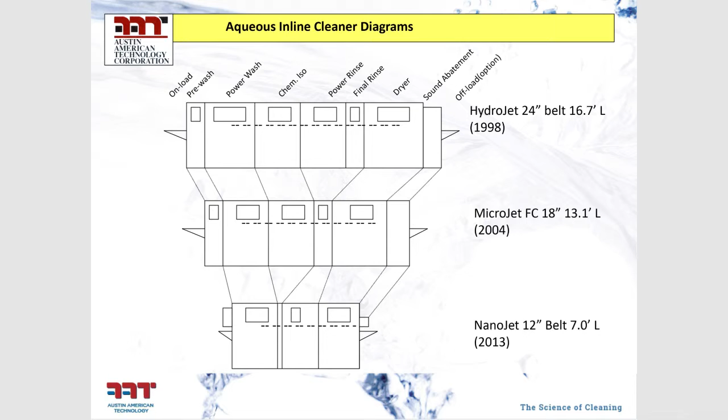So I'm going to focus a little bit more on the HydroJet right now, just thinking that you're looking at the HydroJet or the MicroJet, but we have the data on the other machines as well. So one of the things right off the bat you're going to see on all of our machines is that it's going to have a small footprint. We have the smallest footprint for belt size in the industry. The recirculated power PED wash is unique to our machines as well. And we're going to talk a little bit more about what PED means, progressive energy dynamics, in just a few minutes, so I'm not going to talk about that just now.

We can get up to temperatures of 150 degrees in that wash. The final rinse module is closed loop, as a standard configuration. That means that you would not have to have a DI system feeding it. We can make it an open loop system if you have a DI system in your plant and choose to run an open loop configuration.

One of the very special things about our machines is the jet dry isolation. So everybody else would use an air knife isolation. We're using jet dryer isolations. It doesn't actually dry the board, but it effectively strips the chemistry and puts it back into the wash.

And then finally, one of the big differentiating points we have on our machines is the patented displacement dryer. Our philosophy in drying is you don't want to evaporate any water on the surface of the board, because even DI water has some contaminants left in it. Even if it just absorbed the carbon dioxide out of the atmosphere, it could possibly leave a water spot if it evaporated. Certainly contaminated water would as well. So our approach in drying is to completely displace the water by blowing it off of the board and not drying it on the board.

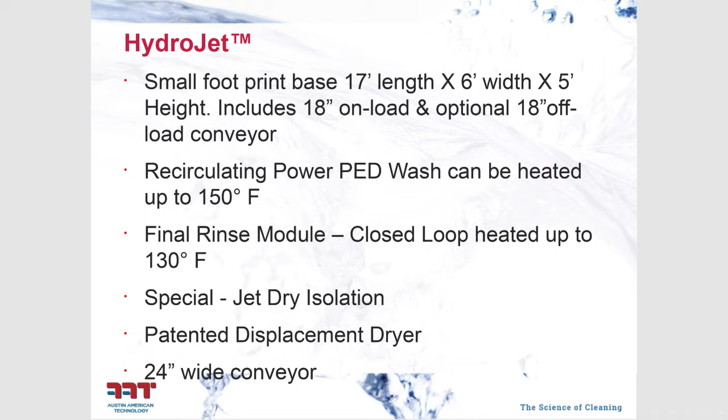A few things about the Austin American Technology machines that really stand out. We have the highest cleaning performance. The coherent jets and the progressive energy dynamics I mentioned previously really give us the best energy for cleaning and best getting under parts. We're going to see a film in just a few minutes about how that works. So it's going to give you your highest clean performance, but also, because of that, your highest throughput. Not only do we have good cleaning, but we also have excellent rinsing and the best dryer out in the market today that gives you the highest throughput.

And the cost of ownership is also the lowest. Not only do we have excellent isolation, chemistry control, DI control, but because the machine runs faster than the competition, you actually run it fewer hours. So the overall result is it costs you less to have an Austin American machine than the competition.

And finally, the closed-loop technology. We have been pioneers in the closed-loop technology. All of our machines, our batch cleaners, our conformal coat cleaners, our stencil cleaners, and our inline cleaners are all closed-looped and offer a configuration where nothing goes to drain. That saves the environment and saves you money.

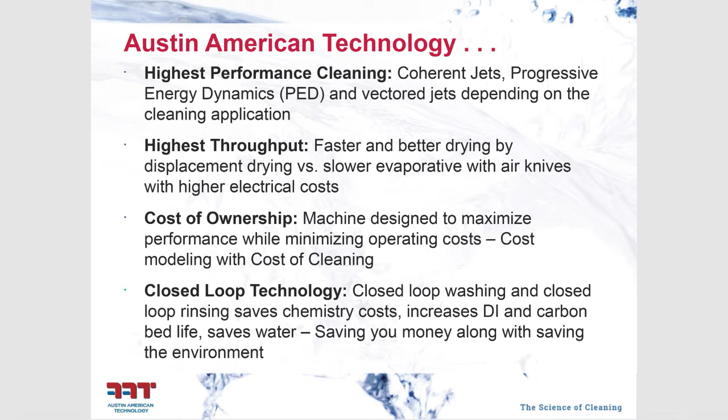So looking at the HydroJet cross-section, I just wanted to point out the sections that we have here. So the initial section is the isolation section for the onload. Basically, it's where we used to put the pre-wash, but we have moved the pre-wash inside of the wash to save chemistry, and we found that to be a very effective design change.

In the wash, you have essentially 5 spray bars in the MicroJet and the HydroJet configuration, and those 5 spray bars are impinging with coherent jets. We can vector the jets to give vectoring underneath the parts. It is the best way to get underneath parts with these jets.

Following the wash, we come out into the isolation section, where immediately we strip the chemistry off and return it back into the wash tank. That strips off 90 to 99% of the chemistry, and there is some optional stuff that we can add into the isolation section that would provide additional isolation. That would be a wet ISO bar and another topside dry ISO bar. That generally would go to drain if we add those options.

In the power rinse section, in the HydroJet, it would come standard with 3 spray bars, and you could add an additional 2 spray bars in the HydroJet. In the MicroJet configuration, you come with 1 spray bar, which can be extended to 3 spray bars. And those spray bars, again, are the coherent jets and give you very good penetration under parts to get the chemistry out, any chemistry that might reside in 1 mil gaps or in connectors and things like that.

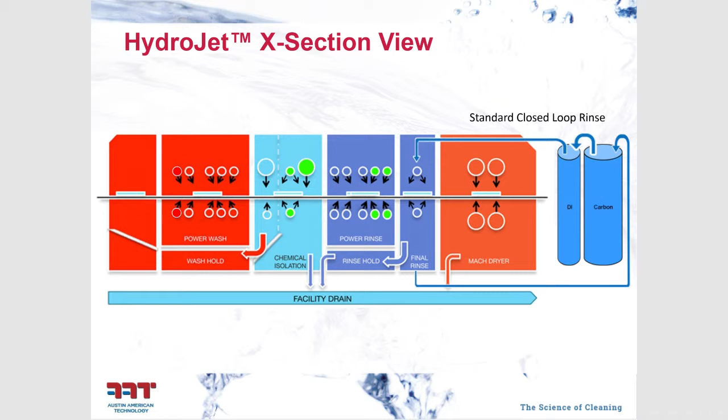So let's talk a little bit about the progressive energy dynamics now. In designing the machines in the very beginning, we did not have progressive energy dynamics. We had the same energy in all sections. And what we found out through our testing is that, especially on no clean fluxes or very highly heated rosin fluxes, we were wasting energy essentially in the beginning. So when we get into the first jet, wash number 1, if we had too much energy, we were just bouncing off the hard flux.

And what we found is we didn't need a lot of energy in wash 1, the first bar, or the first section. What we needed there was just enough flow to bring the flux to temperature and to wet the flux with the chemistry so that we begin the softening process. So we don't need a lot of energy in wash step number 1. When we get to step number 2, we want a medium amount of energy to come in, and we want that to begin to create flow underneath the parts. Now that we have a softened flux, we can get the flow established.

And then in wash step 3, we're going to come with high energy. We're going to begin what we call eroding the flux at this point, because we've got it nice and soft, and we want to begin eroding the flux underneath the parts. That's a very rapid cleaning operation versus dissolving the flux residues. And I'm going to show you a film in a minute that shows you how fast that really can be.

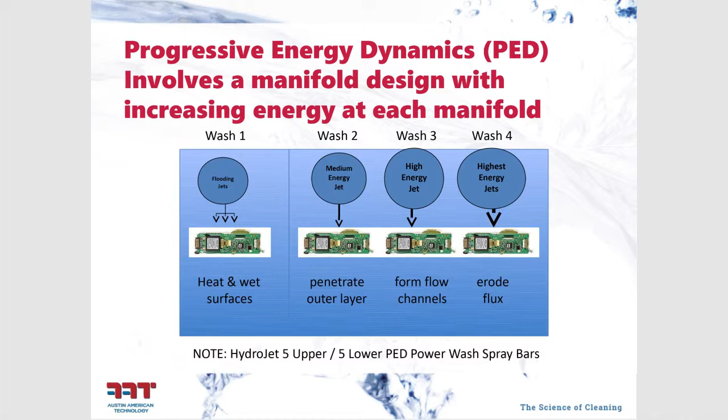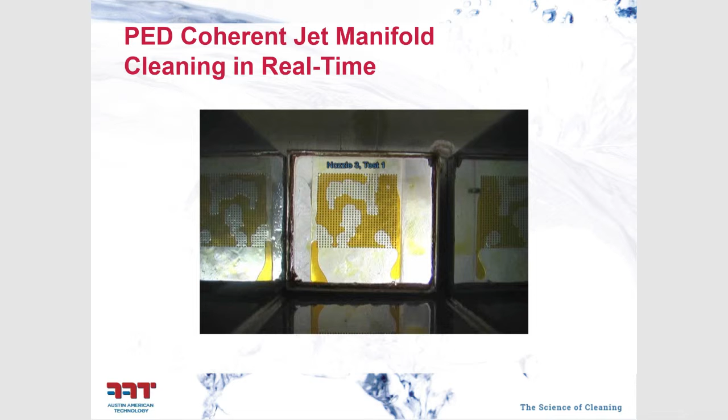Okay, so what I'm going to do now is I'm going to show you a film that shows a simulated BGA, which is made out of glass, and the substrate is made out of glass, and we're going to pass it through that progressive energy wash that I showed you just a minute ago. So I'll go ahead and start that now, and you can watch it run.

So as you can see in the film, we've got the spray started, and the spray is spraying on the coupon. The coupon is passing through the lower energy sections, and we're beginning to get some flow established. As we get into the higher energy sections, you're going to see the erosion occurring. You're going to see that rapid removal of the flux, and the complete cleaning operation occurs in just a few seconds.

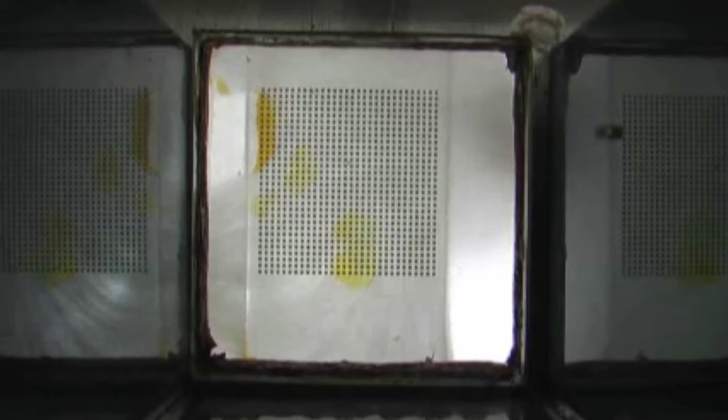All right, well, based on that video, you can see that the cleaning is very rapid in the progressive energy cleaning system. And what that really gives us when we look at inline cleaners versus batch cleaners, we can see that we can clean a lot tighter gaps. And by cleaning, I mean completely remove the flux. In batch cleaners, we can generally clean down to 2 to 5 mil gaps. We start having a lot of difficulty below that.

But in the inline cleaning process, we can get down, because of the energy, down to 1 mil gaps. So we can do things like flip chips, QFNs, some of the capacitors and resistors, which are more difficult in the batch cleaner.

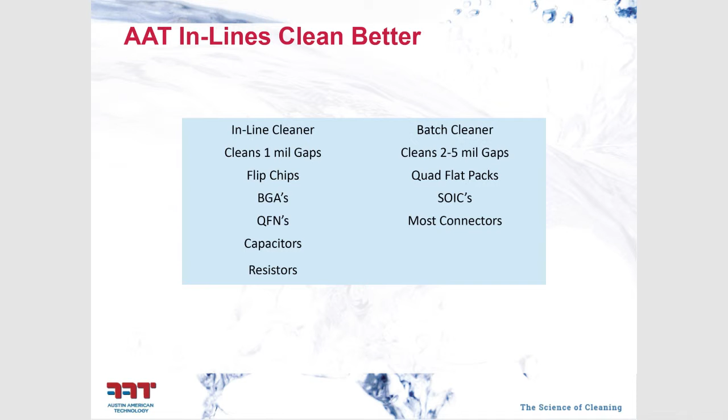So let's talk a little bit about the displacement drying now, and what we're looking at in displacement drying is getting rid of the evaporative drying, and basically going to what we call displacement drying. So most of the other dryers out there use a combination of both the displacement from the air knife and then evaporative drying using heaters or just convective heat. So what we're doing is we're not using the heaters, we're not using convective heat. We do get some heating in the turbine, so we're running at about 100 to 120 degrees Fahrenheit, but we're actually going to be blowing off the water.

So in evaporative, we're going to heat it up and evaporate it, and of course when we do that, that leaves residues behind. Our approach is to use a mechanical approach, come in and push the water off, and that is the approach that we take. In doing that, it takes, in theory, about 200,000 times more energy to evaporate the water than it does to push the water off of the board.

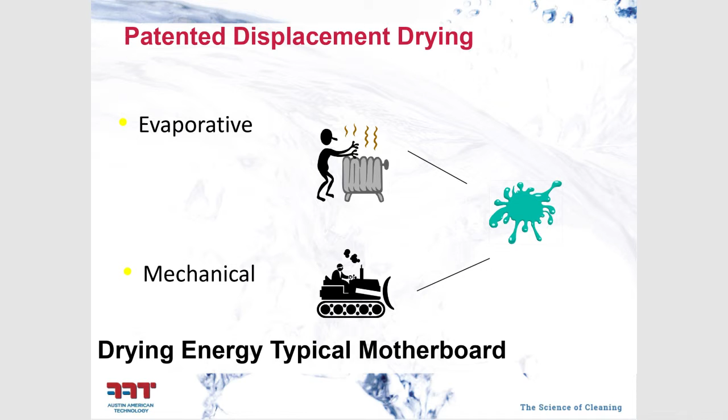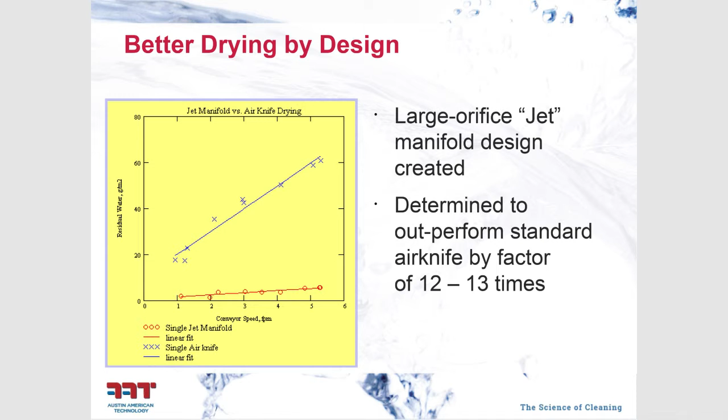And if you look at the blue line here, you can see that for the air knife we have a lot of water left after a single air knife pass, so we have to make multiple air knife passes and probably use heat in order to get this water off. So even at 1 foot a minute, we're leaving 20 grams of water per square meter on that board. With the air jet, at that same 1 foot per minute, we're leaving less than 1 gram per meter squared. And even at the higher speeds of 5 feet a minute, we're only leaving less than 5 grams per meter squared of water on the circuit board. And so you can see in this graph that the air jet is much more effective than the air knife is.

So in just looking at this in computer modeling, when we looked at the computer model for the air knife over a 3-inch distance, we found that the high velocity, 200 mile per hour velocity indicated by the red portion of that jet, breaks up within an inch and quickly slows down to less than 50 linear feet per second, compared to the air jet, which over that same 3-inch distance holds together the entire distance and impinges down on the board with that full energy. That is the energy needed to push the fluid out from underneath those parts.

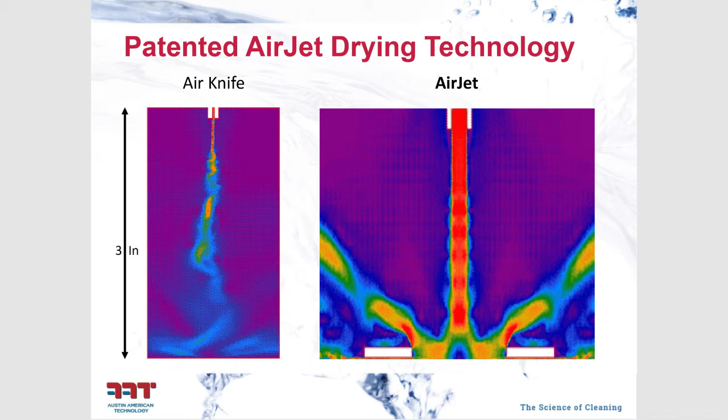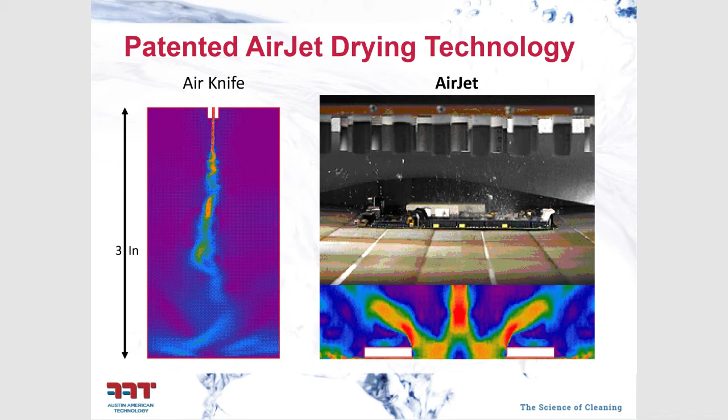So I'm just going to go over a few of the maintenance benefits that we have in the machine at this point. Of course, we've talked about the compact design. That really minimizes your floor space, makes it easy to install, lowers your cost of operation for the machine.

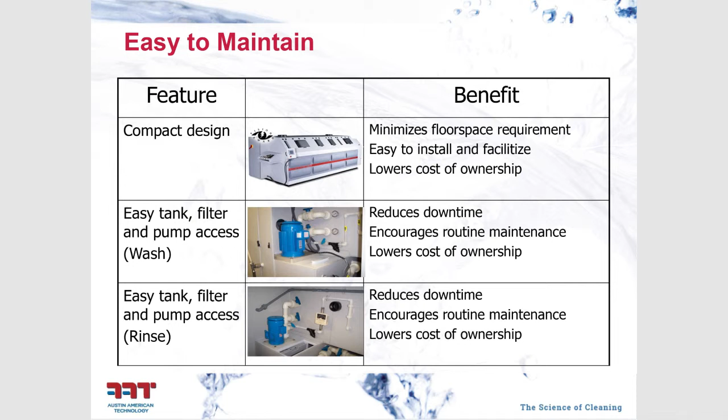It's a very easy to maintain, easy to use system, and one of the reasons that we have advantages both in footprint and in maintenance is the way that we designed the pumps for the wash and the rinse sections, I might point out. So some other things that we look at, we have easy to upgrade spray bars. If you have a need for a different spray bar set, maybe you don't need the high energy, maybe you need fan jets, those are easy to change out.

The HEPA filter on the dryer: we use a single blower for the dryer. It has a built-in HEPA filter. It's conveniently located right behind the door, easy to change the filter, easy to access the blower and to change the belt on the blower if you need to do that. No problem doing that. It also has a color touchscreen interface, which simplifies the use. It has alarms on the screen that would keep you posted on the status of the machine. It has icons that will show you if there's any alarms and keep you posted on the machine status.

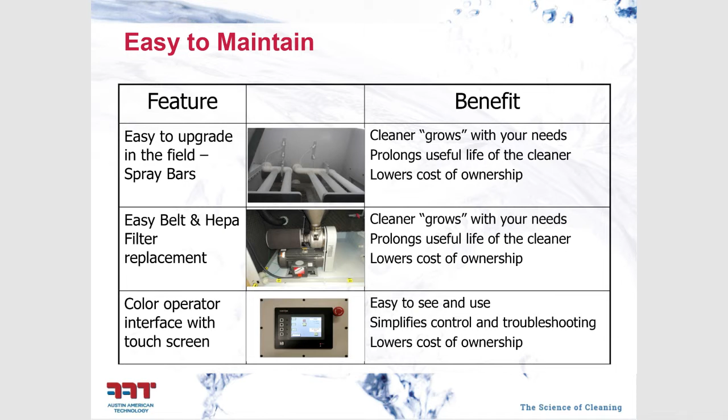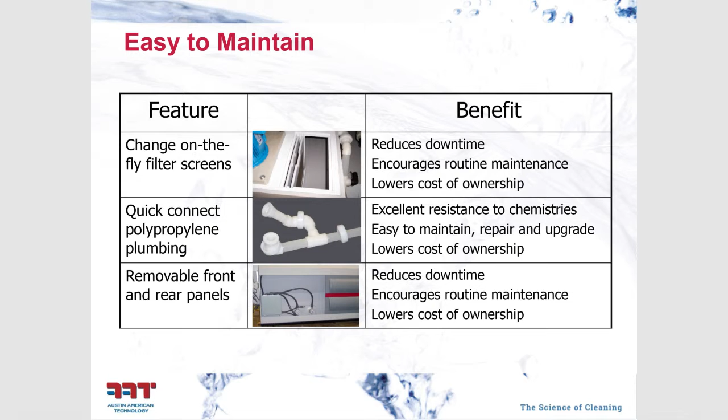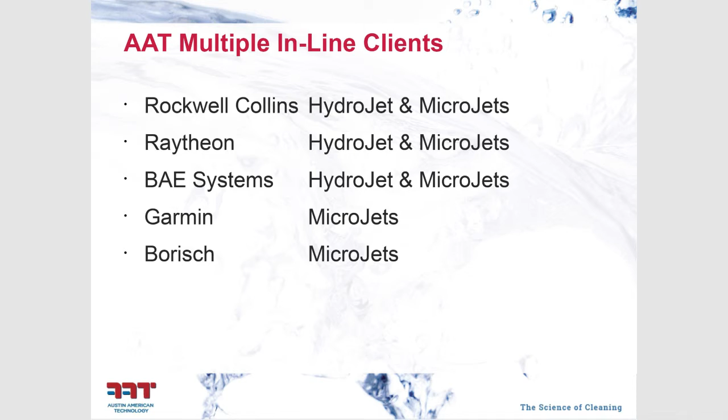In summary, the AAT Jet Inline series has superior cleaning performance because we have better cleaning jets, and we have designed them through computer simulations and through actual testing where we've taken the transparent assemblies that you saw on the film, and we've run hundreds of tests to determine the best spray configurations that clean the boards fastest. So you get the highest throughput in our machines, not only because of the cleaning, also because of the better drying, and you get lower operating costs because we are better at stripping the chemistry out and keeping the closed loop system maintained properly.

The inlines are designed to maximize your performance and lower your operating cost. I think you've seen that clearly in the presentation. And we've been doing this for over 30 years, so we have a lot of experience, so we can help your team out. We can be the third party that when you need that expertise, call on us, and we've probably seen it before. We've been doing that for 30 years, and we're ready to keep doing it for another 30 years. Look forward to running the test with you guys and showing you these advantages so that you can realize these advantages for your company.